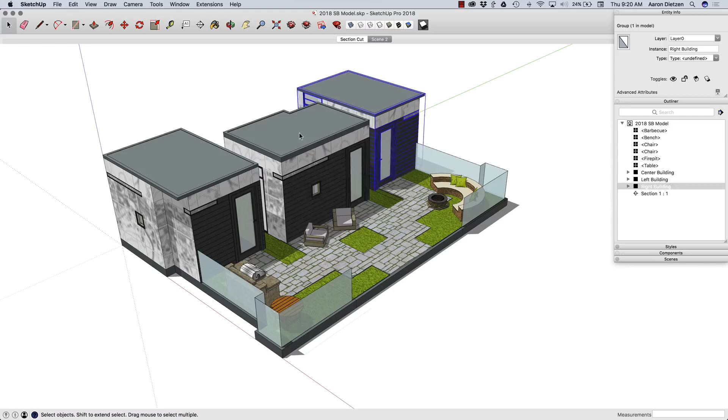So I have my outliner open over here. You can see I have a bunch of components, a bunch of pieces in this model. The most important part are these 3 big pieces out here. They're little houses, cabana kind of things.

Each of these, if I expand the outliner, you can see have a bunch of doors and windows in them. So I'm going to drill into one of these. I'm going to open up the component for this center unit, and pick on one of these pieces. Right here, the first one is a door.

Over here I can see I have a definition name. This is called glass door, and this specific instance is called D1. Down here under the advanced attributes, which you get to by clicking the little plus if it's not already expanded, I have my advanced attribute information: price, size, URL, owner status, and my IFC type if I want to define that. For this particular export, just the door and window schedule, all I've populated is the size. So this is a 3068 door.

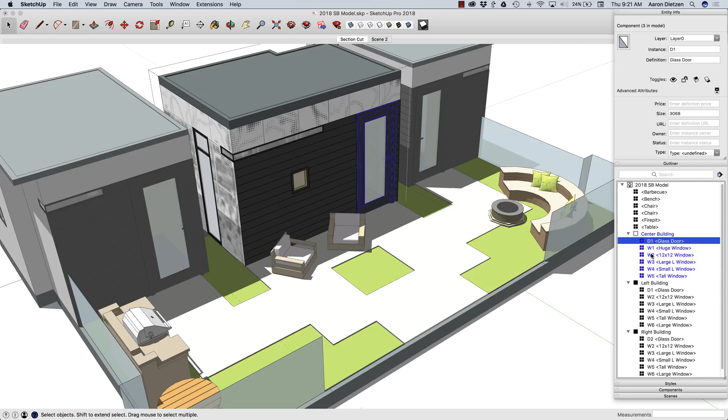I've done that for all the doors and windows in each of these units. An important thing to note is that instance is what's going to generate the label. For most of these, it's going to be the same - so the same small window repeats throughout, and it's called W4 wherever it's used.

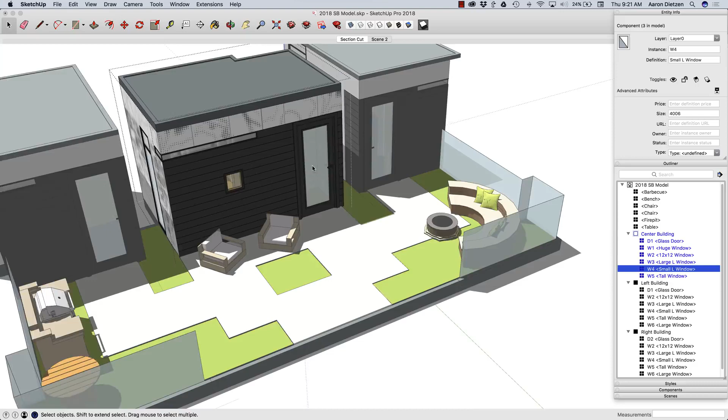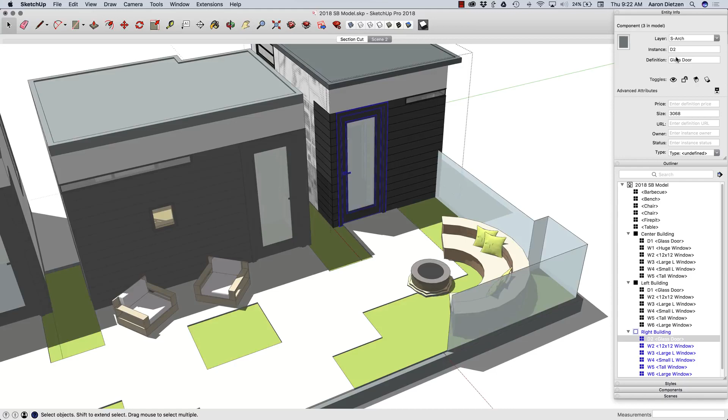The door, for example, is the same component from one of these units to the next, but you can see it's reversed. In this one right here, I have it selected, it's called D1. If I come into this component over here and select the same door, it's the same definition, glass door, but the instance name is changed to D2 because it's an opposite swing from this component over here. So the component is what SketchUp calls it, the instance is what I want to call it on my output.

Alright, so that all looks pretty good. I have that information in there that I'm going to want to pull for my schedule.

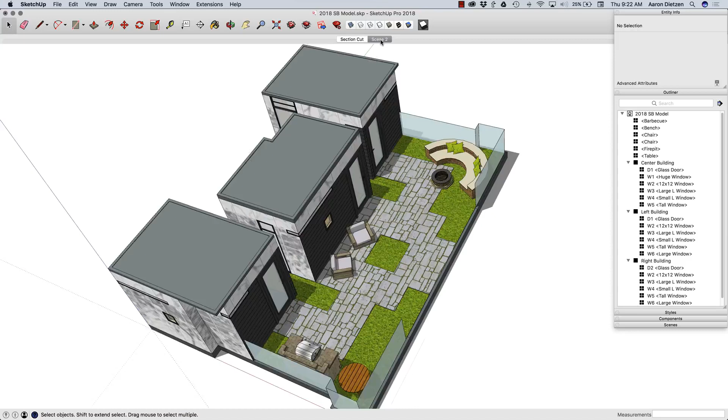The other thing I'm going to look at now is my scenes. I have 2 scenes: one is a section cut, looking down from above, cut through; the other is just this kind of 3/4 view. I'm pointing this out because when we hop into LayOut, I'm going to reference those scenes, and we're going to create our output from those 2 scenes.

So now that this model is all set, ready to go, I'm going to generate the report. Generate report is what's going to allow me to create my schedule. So I'm going to hit generate report, and create a brand new template by hitting create new template.

First thing I want to choose is my filter - how do I want to choose which components I report upon? A couple options here: first is selection, do I want to do the entire model or just what's picked? I'm going to do the entire model because I set my model up to take advantage of nesting over here.

Nesting is what level in the outliner the things you want to report are on. So if I look at my outliner, the top level is my entire model. Level 2 is these pieces - barbecue, bench, chair, fire pit, table, all that stuff, plus the 3 buildings. Level 3 is my doors and windows. You can see I intentionally set up my outliner so that I would have these pieces in this hierarchy.

So I can come in here and say only report upon components in level 3. That's going to only get these doors and windows.

Now if you didn't set your model up that way, with things in and out of different levels, or you have everything in the same level so you can't report upon a single level, that's fine. You just want to use current selection and go through and pick the items you want to report upon. It's pretty easy when you have the outliner.

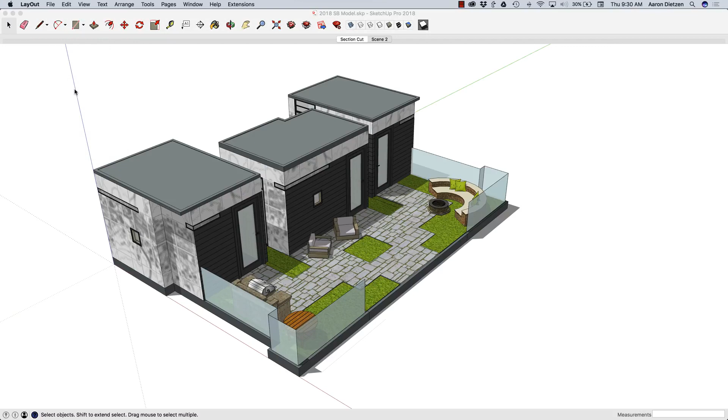Now I'm going to go ahead and hit save. I don't think I made any changes, but before I generate my LayOut output, I want to hit save and send to LayOut. LayOut's going to open up with my default template and my current scene showing up in the window. That looks good, but first I want to change my scene to that section cut, which gives me that top-down view where I can actually see the doors and windows.

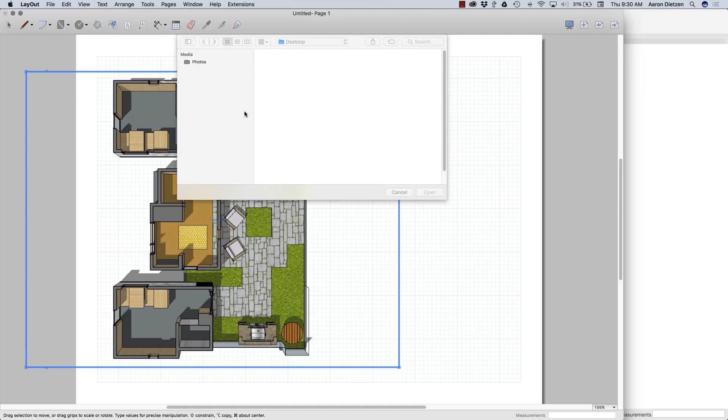That looks pretty good. I'm going to scoot that over, and I'm going to insert my schedule. That comes in as a new table, and here I have entity name, the items, quantity, and size. This is all editable at this point - it's just a table, so I can come in here and change things.

For example, I can say 'label' if I don't want it to say entity name. That's easy to do. Next thing I'm going to do is label the doors and windows. So I'm going to grab one of these, click on this front door, put it up here, slide it over, and now I have the option of choosing what to put in here - I can choose my different levels.

I'm going to choose on the D2 level to put in the component instance. I could also put in the size if I wanted to call that out, but in this case I just want to put the D2 in. So I click out, click out. Here's another window, click there. The default will use whatever it used last time, so it's going to use that W2 in this case. I can come around and click all of these to put them in - a great, easy way to create that.

It corresponds to this section right here. And I'm going to, just for fun, make a copy of this. I'm going to shrink it down.

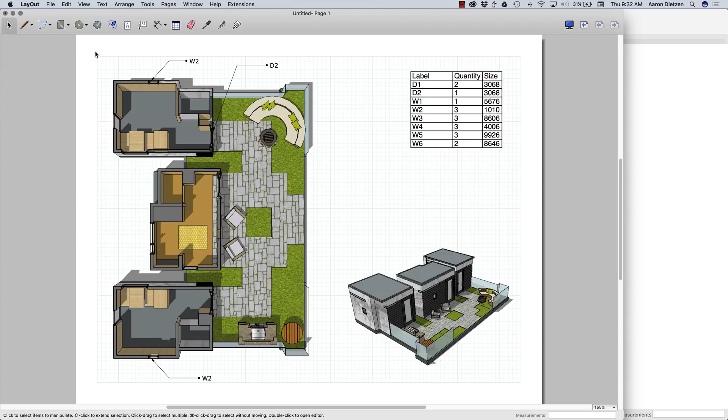And I'm going to add my model from the other scene - here's my scene 2. Because the cool thing is, these labels will correspond to any part of the model. So here I have another copy of the model, and some of these windows that I can't see - like this L-shaped window that's above the section cut - I can call it out on this one. Those labels again correspond to the same schedule, because I'm pulling the information off of the exact same model.

So there you go - a pretty quick and easy way to create a door and window schedule with labels using SketchUp and LayOut, with Generate Report and Advanced Attributes. Thank you.